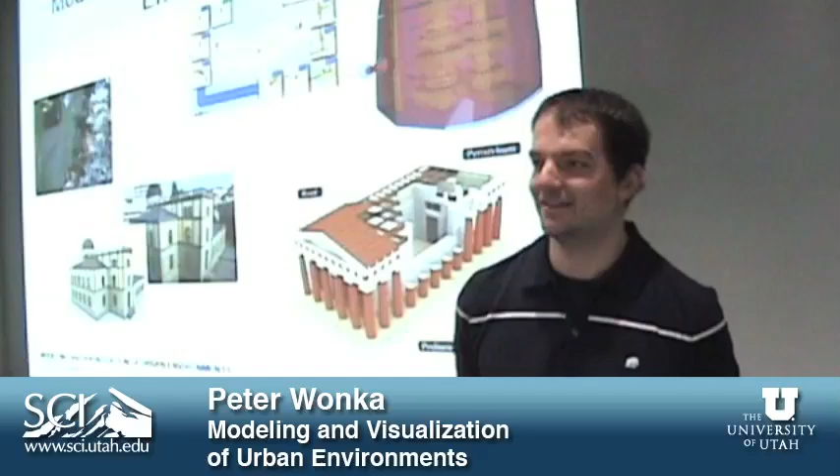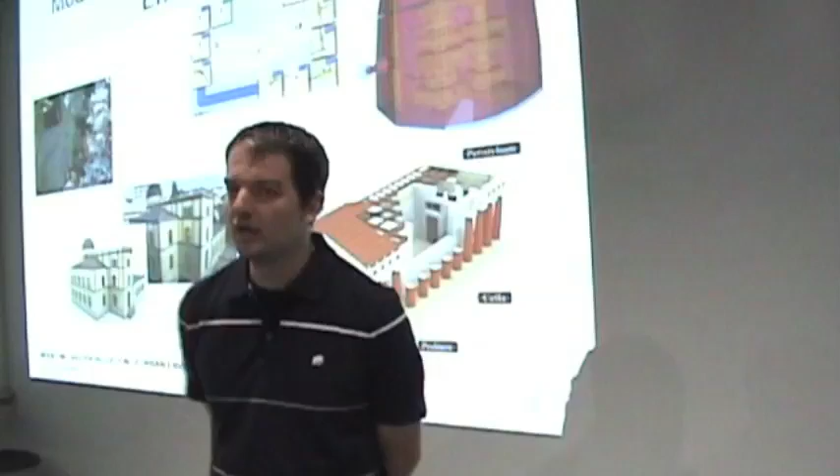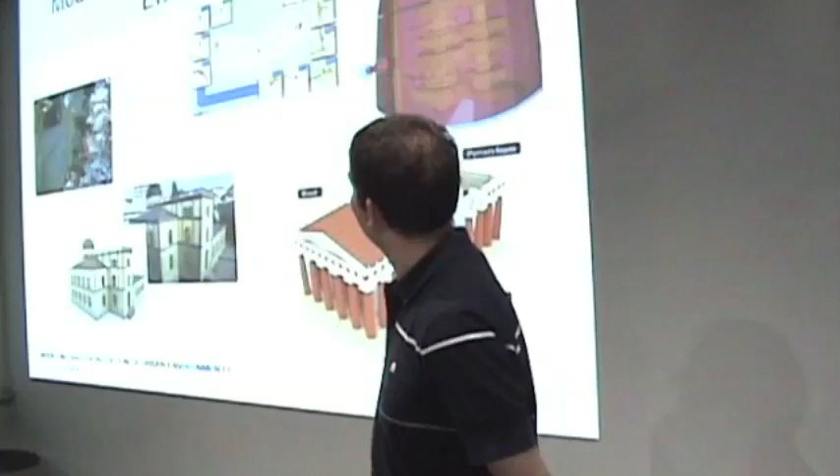So I'm going to talk about modeling and visualization of urban environments. Even though visualization, I named the talk more to honor the strong tradition of Utah. It's maybe not that you will recognize it as scientific visualization in the sense of the VIS community. It's more some visualization of what I think should be visualization, maybe.

So my background, as Chuck said, we had some overlap. I started out in Vienna, at the Vienna University of Technology, and I originally started to study computer science. Back then, after high school, I had a sister in elementary school, and my mother complained that I was working less than her for my studies, so maybe I should do something else. That's when I decided to study urban planning on the side. And as you can also see in my research, I loved cities back then. I still love them now, and I really like to work with urban environments, and this is also where part of my interest is coming from.

As a student, I was also in Grenoble, postdoc at Georgia Tech, and now in Arizona State. What you can observe from my career is a trend of going from the cold to warmer and warmer weather. But I might have overshot a bit at Arizona State, because now it's a bit hot in the summer, so maybe Georgia Tech was the real optimum there.

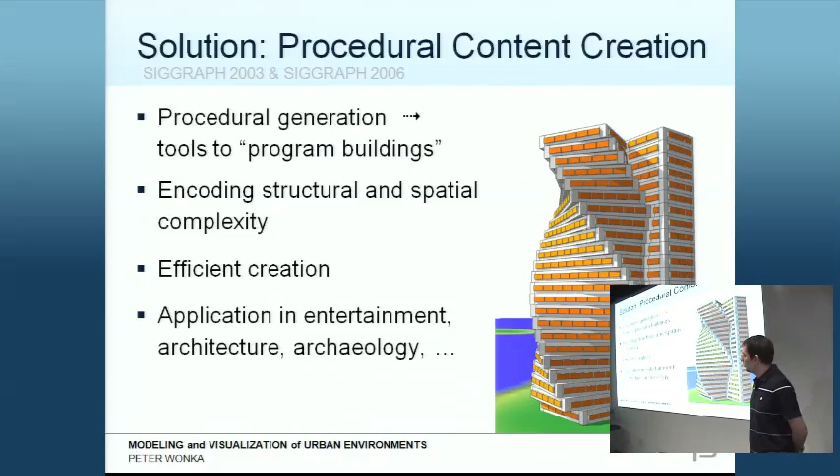And there are a lot of applications for this. Maybe I can briefly illustrate the main aspect of our solution with this video. What you'll see here is just the best video we made, showing a building by a Swiss architect, Semper. This is an observatory.

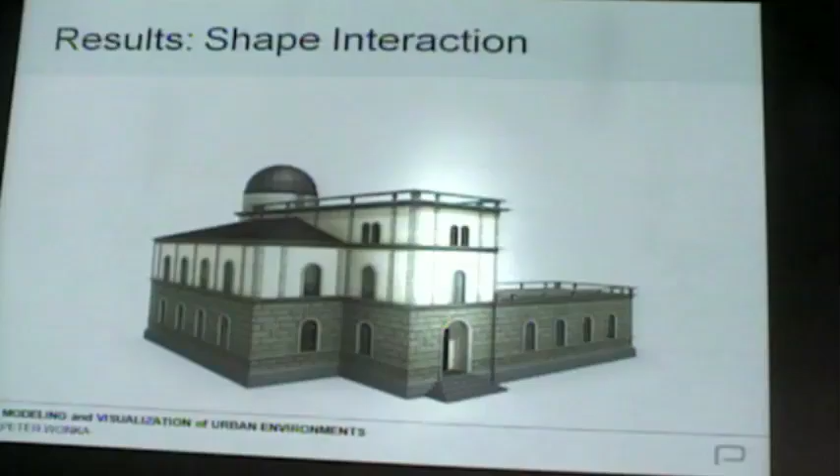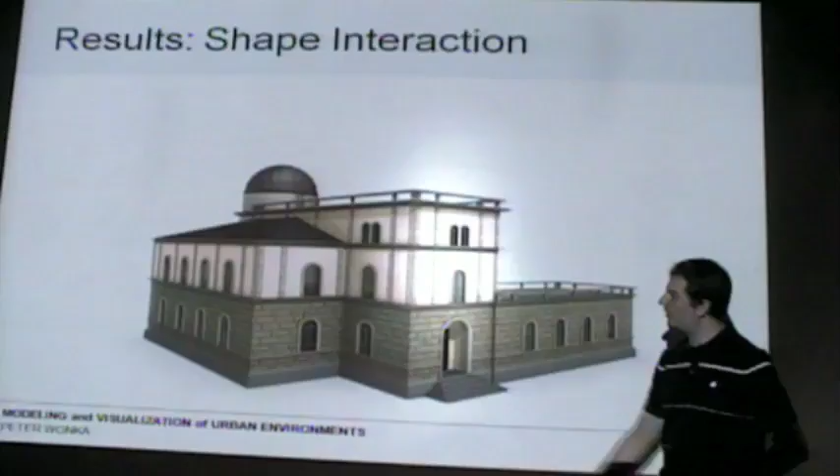In architecture, you want to start with a mass model and then fill in the details. The mass model you see here is one rectangular block for this part, another rectangular block for this whole part, and then there's this rectangular block. There's a roof on it, but in principle it's a rectangle. The fourth mass here is a cylinder.

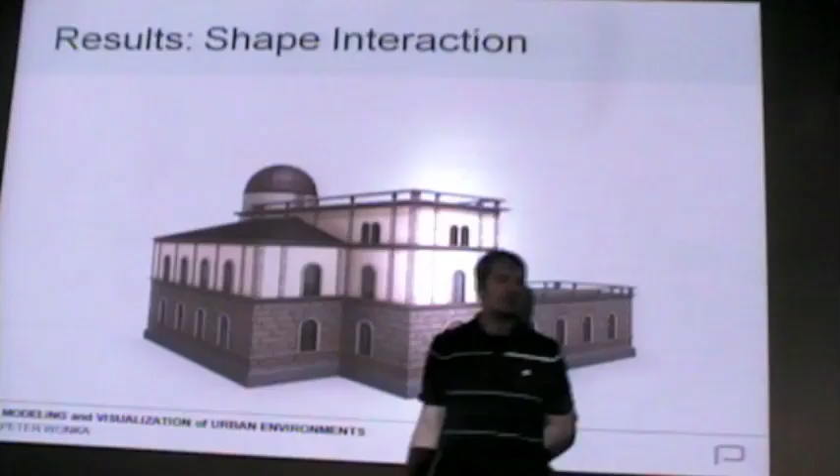If an architect designs a building, let's not talk about free-form architecture but more the traditional architecture for the common person, you'll see a lot of buildings that are basically these masses stuck together. So one part of the solution is to have a way to procedurally describe a variety of masses and combine them. The second part is how can you add facade details, windows and doors, onto these masses.

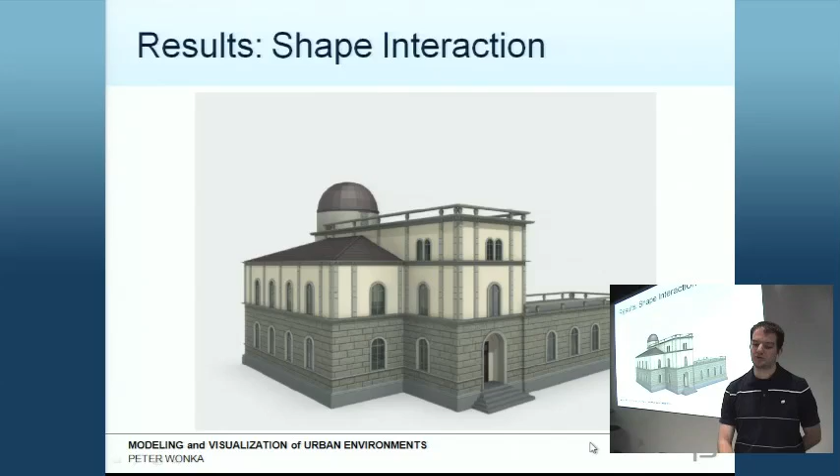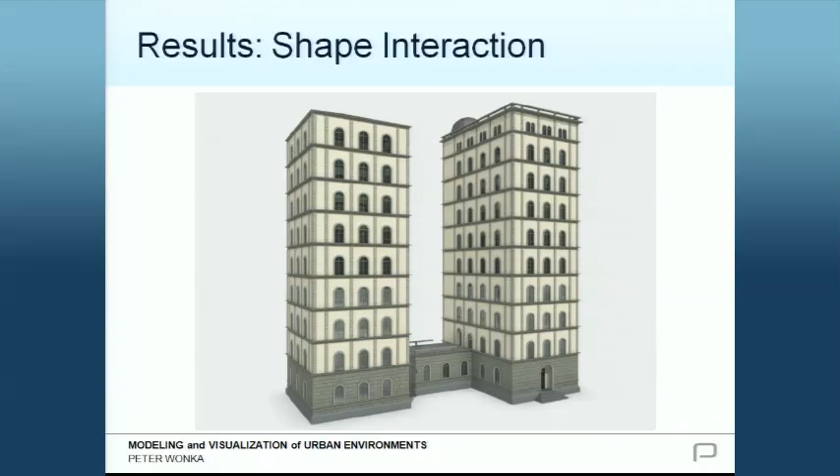The approach we picked was based on this very successful L-system work for tree modeling. We did a fair amount of modifications and changes to be able to model buildings with grammars. In this video, these four basic masses are animated in Maya, but the details get generated in a plausible, somewhat consistent way automatically. The animation of the building doesn't make sense as such, but almost all of these different configurations you see could be used as a building in a city.

So how can you use this type of work besides the straightforward approaches for design in games or movies, where someone says, I have nothing, I want a city, what can you give me in a quick amount of time? One of the major collaborators is archaeology.

If you look at this, this is a virtual reconstruction of the city of Pompeii, which was unfortunately destroyed by a volcano. But archaeologists are interested in maybe how it looked like.

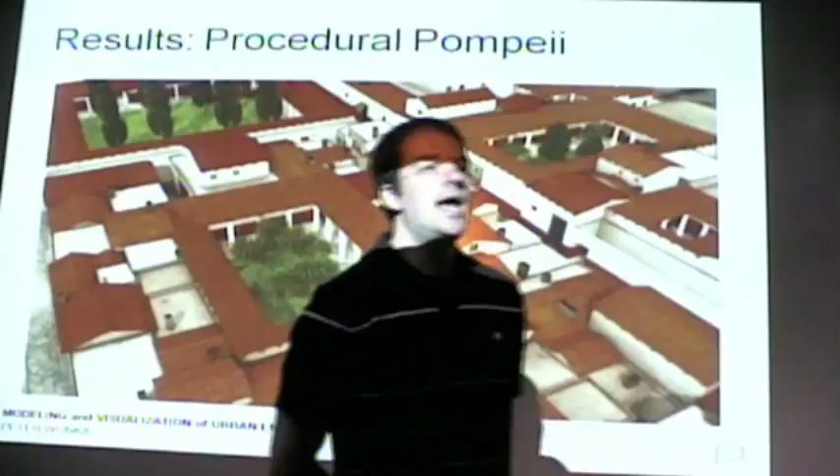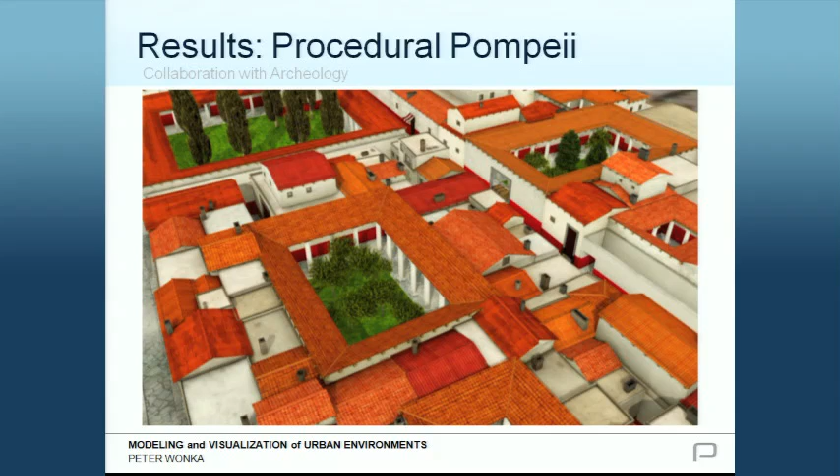They had from excavations maybe some building footprints. So what we did here is we took the building footprints, plausible at least as far as the archaeologists think is how it looked like, and we added based on the drawings they had and different other resources. We tried to encode their knowledge and the variations of how this could have looked like. It's unclear if the archaeologists are totally happy with the results, but this is what we think is the best guess at the end.

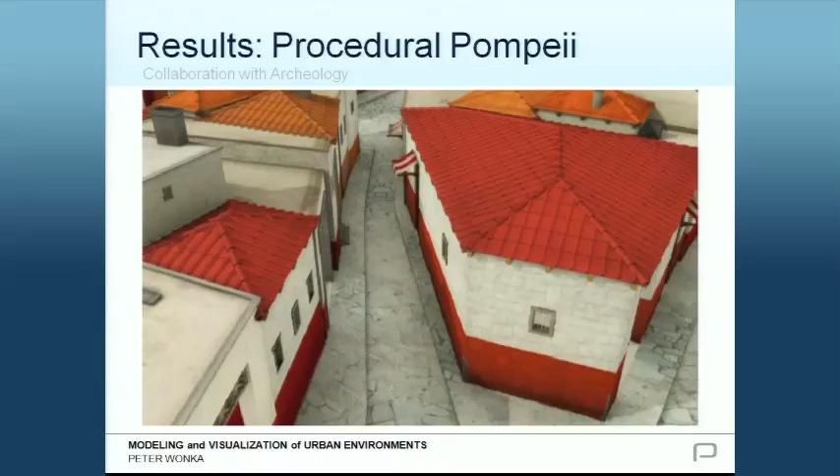So some part is real, the basic footprints and the ideas of how the building looked like, but all the details are basically generated as an estimate. There's no way you could say this door was exactly here before it got destroyed, but you can say maybe this style of door was very common.

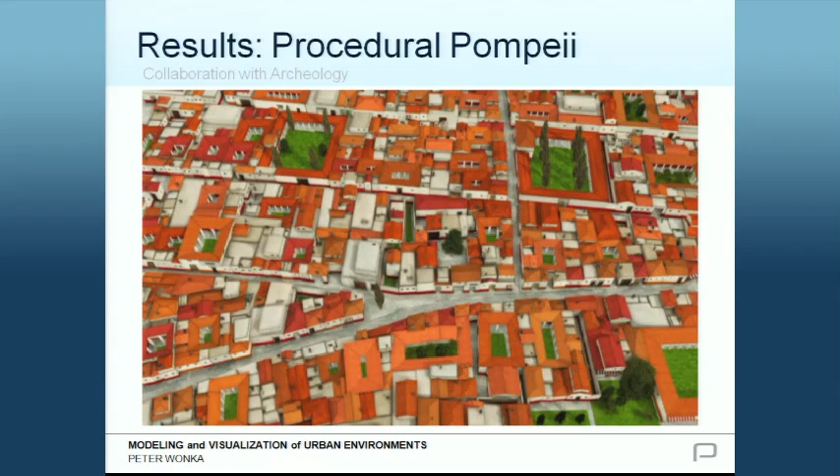So they have maps of the streets. Are the streets laid out according to the map? Basically we start out with GIS data. In modern archaeology, they actually make a photo showing what's reconstructed versus what's real.

Do you have photos or renderings showing what's slightly different in color - what are the things that are really there versus what you built procedurally? Some buildings are still there and some are not, so it's interesting to see the match between those. We basically didn't have the resources at that point in time to make it archaeologically viable. It's more that we show what we can do, so if someone has money, they can invest in us.

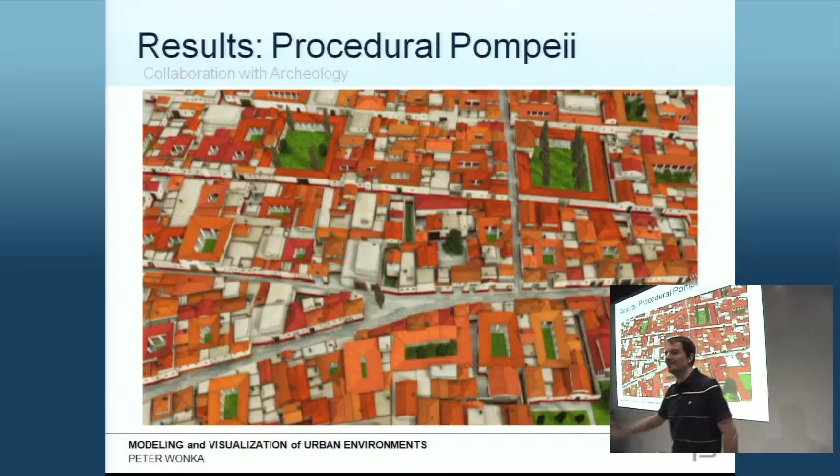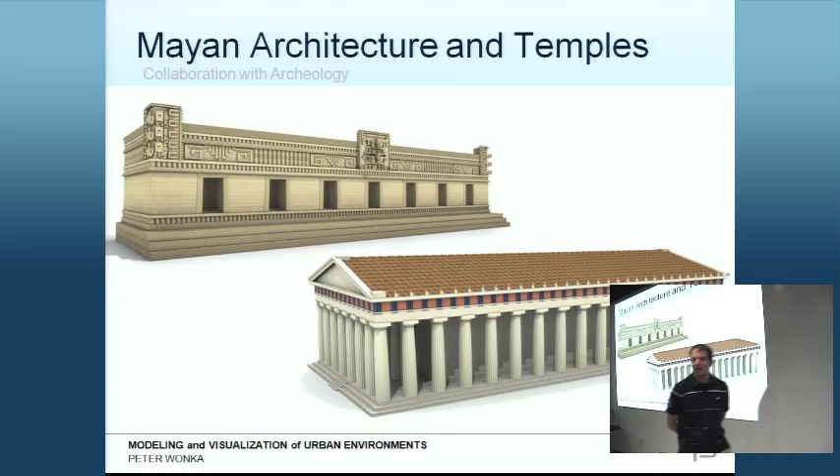This is maybe some work with archeology, mainly to illustrate one point of the application. If you do procedural modeling, you'll get complaints because people say you're creating something that's not real, and we're architects, you're insulting us. But the issue is you still somehow need it - when architects create designs, they come up way late without details, and they need help making their early mass models look good enough to win multi-million dollar competitions in visualization.

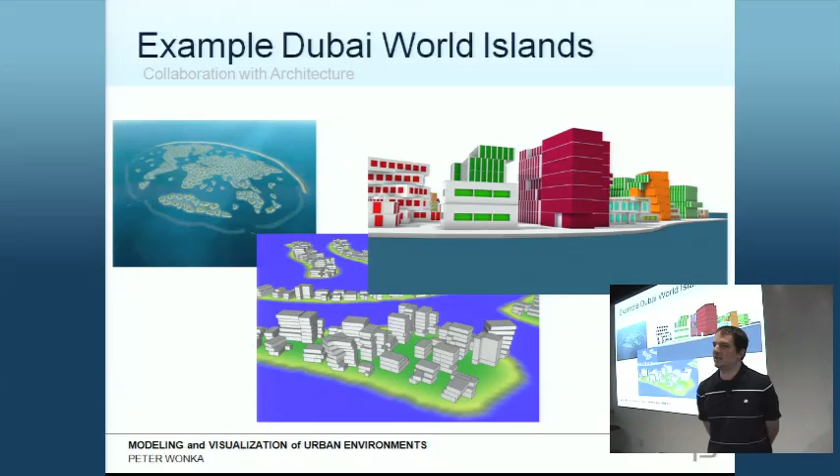They're split. I don't want to say there's a huge line of architects, but a lot of architects are really interested in this - they want to push technology. But probably half of the architects will think we're crazy. I can live with that.

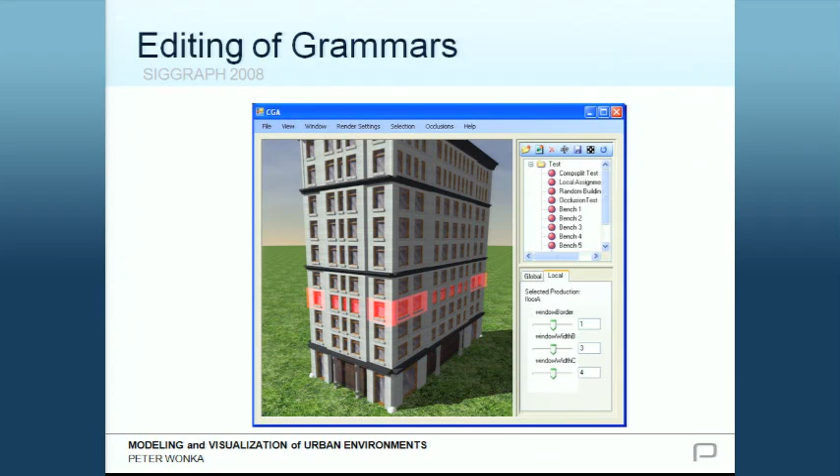So now we have this tool to write these grammars, and if you've worked with grammars or L-systems, it's obvious these are difficult to use. You need to be good at it, and we saw a lot of potential there. One of the first major obstacles was getting away from scripting, because in computer science you feel the simplest scripting should be accessible to everybody, but it turns out that's not entirely true - even 4-line scripts might overwhelm a large part of the population.

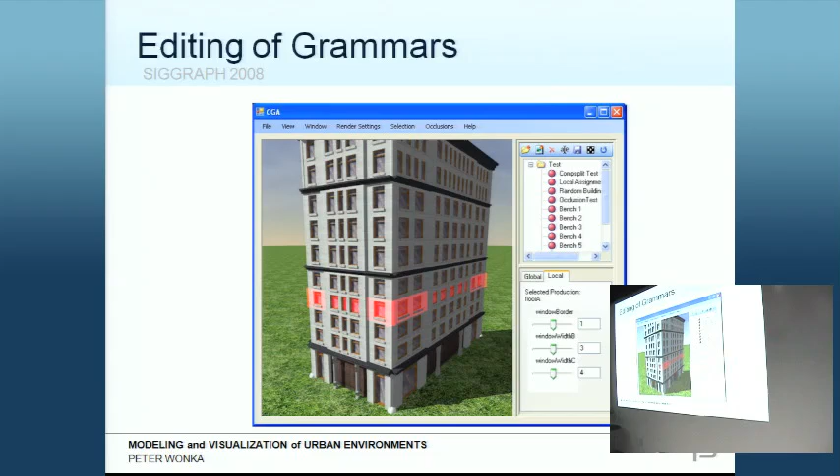So the challenge we looked at in 2008 was: can we, with a purely visual interface, describe these architectural rules? What you see here is a building that is still procedural, so you can take the footprint and change it, change the building height, maybe use some sliders - but all these architectural rules were created with a visual interface.

The second thing we looked at is how to edit a procedural model. Let's say we have this building, and you select this floor shown in red, then want to change the window type manually. So you make an edit - and the fundamental challenge in procedural modeling, which several other people realize too, is if you then make another edit to the building, you don't want to lose the manual edit you did before. Let's say I change the windows, then change the building height - I don't want to lose the window change, though there are several design choices and trade-offs. This is the problem we analyzed in 2007-2008.

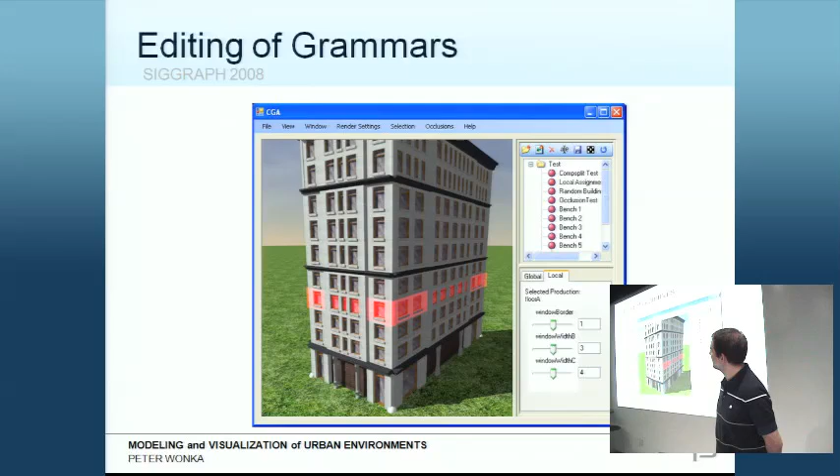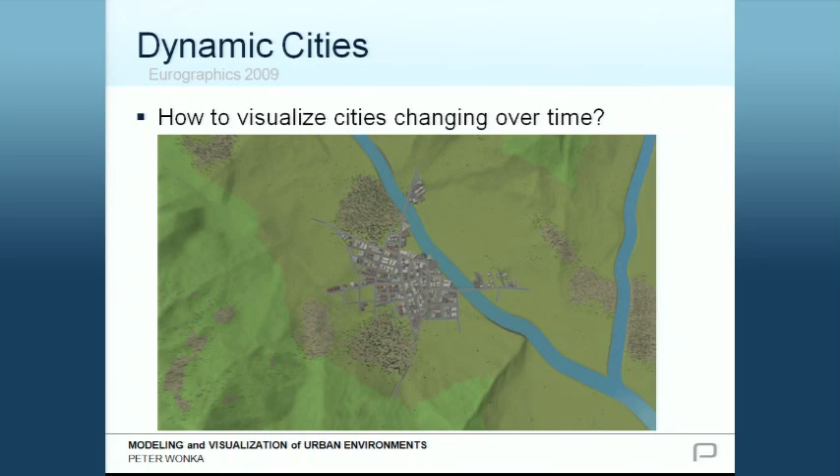This work in 2009 tried to look at the potential to merge our work with urban simulation. So you see maybe a city like this one, and you want to know how it's going to grow and change over time - maybe at one or a few time steps it's bigger, and so on. The work that was there before in urban simulation, very famous, is probably UrbanSim.

I don't know where it started. I think it's UW, and now the guy moved to Berkeley, Paul Waddell. What they do is they simulate urban environments on a grid base with fairly large grid cells, maybe 200 by 200 meters, and they only have aggregated information.

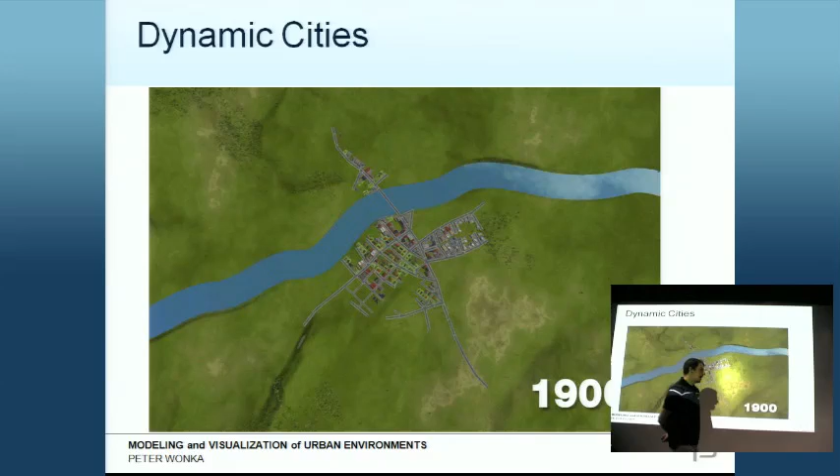So what we were interested in is, can we give a plausible geometric interpretation to urban simulation? This work has a lot of advantages, but it's still not finished. So this is more like a sales pitch from our side about what we think should be done in urban simulation, or what could be the next really interesting step to combine computer graphics and urban simulation.

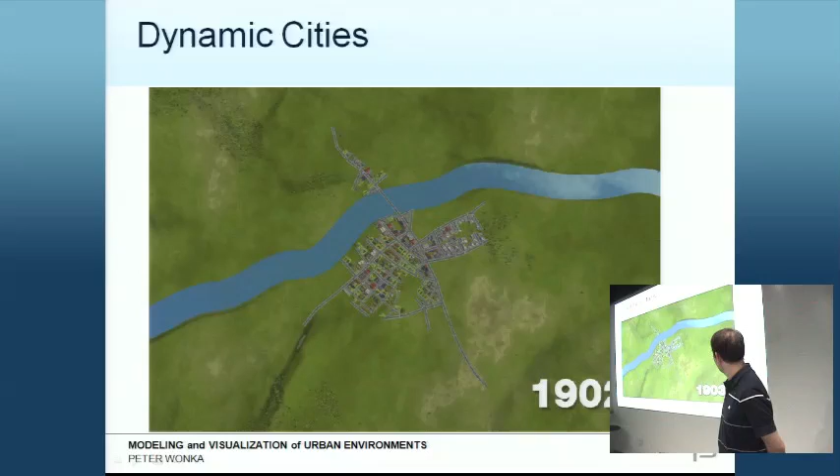So for this, we basically wrote our own urban simulation system. The real achievement from our side is that we wanted to give a plausible geometric interpretation to urban simulation. So we wrote the traffic demand model, the land use model, and all these things. Then, hopefully if the video starts, we basically show the growth of this virtual city.

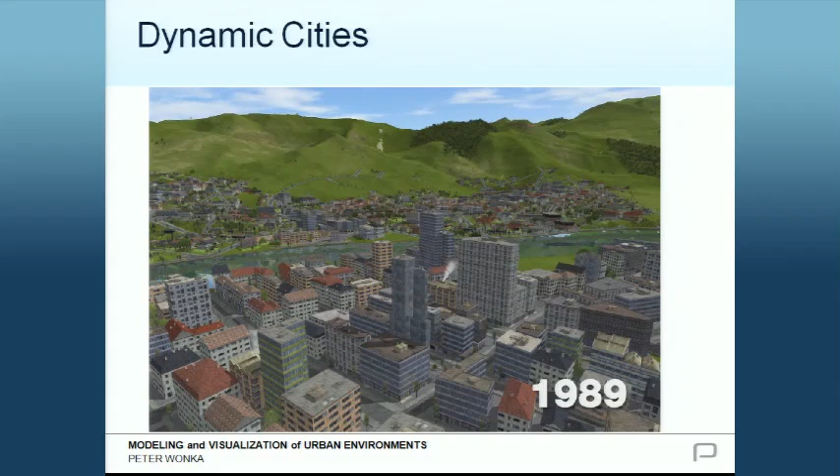What we also did is we basically took Las Vegas as a validation of our approach. We took maps from Las Vegas from the 60s, because it grew so rapidly, and then we grew Las Vegas for several years and compared it, to see how reasonable our approach was. I think we did okay, even though again, this work is

open for discussion. A lot of people in urban planning and urban simulation are very technology averse - they don't like this type of work at all. But several people we met really tried to work very hard on this.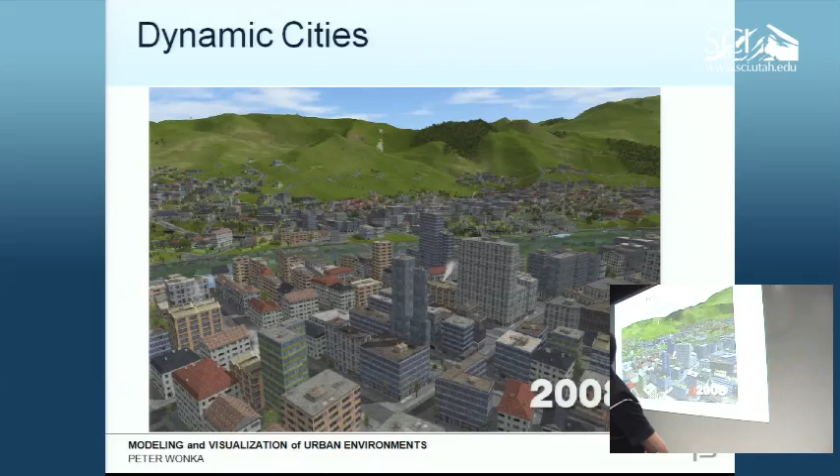Can we give a visual interpretation of how the city is going to evolve? Because in fast-growing cities that I happen to live in, like Phoenix and Atlanta, it's difficult for people to interpret maps that show urban sprawl - they don't get as much out of it as if you showed some visual interpretation of it.

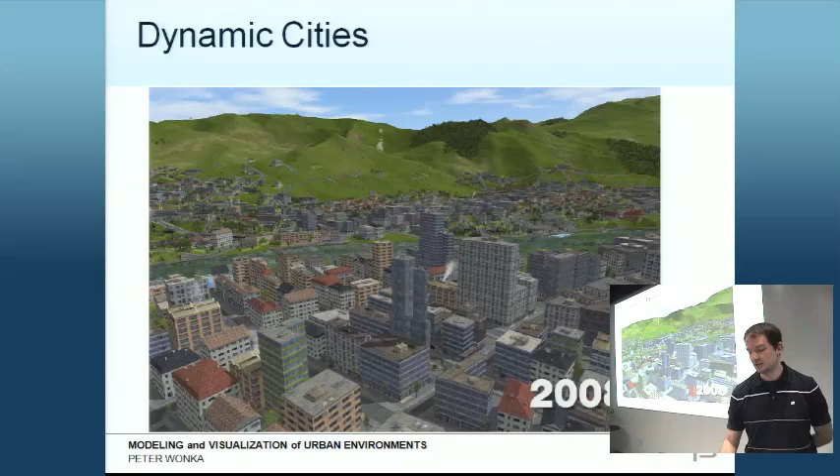And there are urban planners whose goal is basically to do exactly what we did here. Just some example from a real project, a bit simpler geometry, where we used similar technology.

So now this is the time to honor Guoning, who is here. I was fortunate to work with him on this project.

The project somewhat started with me knowing Eugene Zhang from OSU - he was very interested in tensor fields, and I was very interested in urban environments. So the problem that we wanted to study is the relationship between fields and graphs, and I think it's a great problem. There are still several really important questions out there.

But the overall problem is this: you have a field, how can you control the graph? How can you go from a field, like a tensor field, to a graph? And how can you go from a graph back to a field?

Now with this work, we were not fully able to solve this problem. I think we did fairly well on how to go from a field to a graph, but we were less successful in answering the question of how you can go from a graph back to a field.

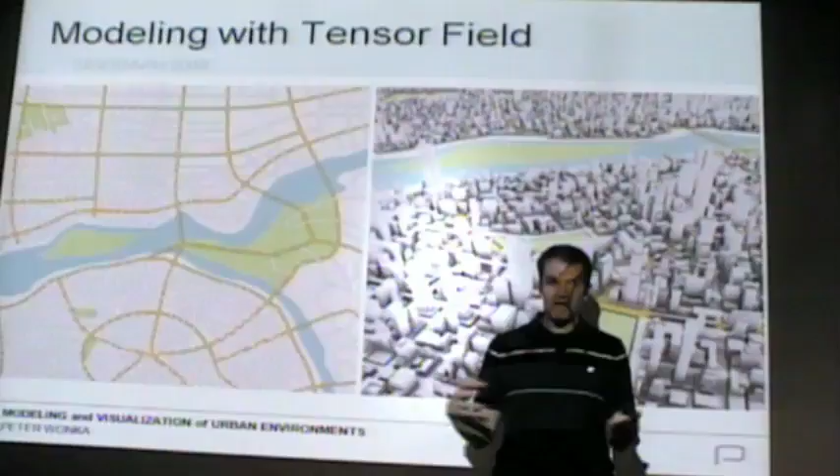And why I really love this work is because somehow I love to study the urban structure of roads, but it was also giving rise to interesting challenges in tensor field design. So we came up with several novel contributions to tensor field design itself, such as some hierarchical design and several things that came from this application in street modeling.

So what you see here is just some output of the street graph itself, and some 3D rendering.

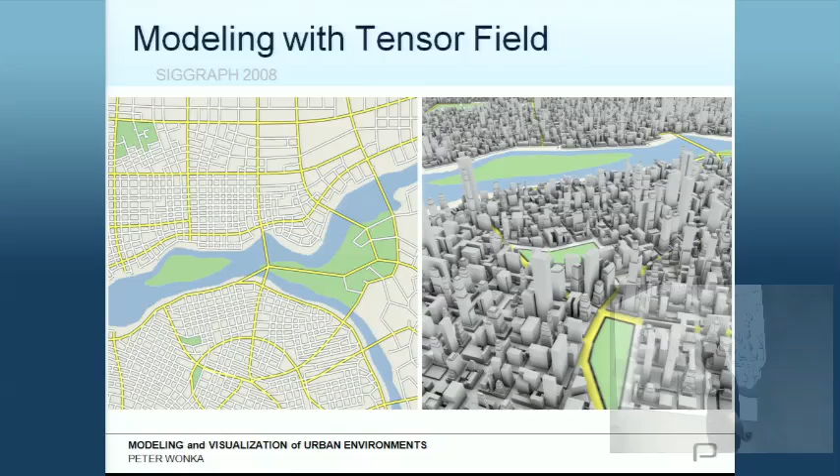And then based on this work, as a next step, we wanted to see how we could basically look at this interplay between pattern design and field design on a surface. So what one of my students, who's graduated now, looked at was: let's say I have a field on a surface - how can we use the field to basically control a pattern on the surface?

And these two renderings should somewhat illustrate the problem. So let's look at, I think it's the Lion or Griffin model, to the left. What you see here is a visualization of a curvature tensor field.

It's done by placing glyphs at various spots on the surface, and based on if this glyph is cut in one or the other direction, curvatures are positive or negative. Based on the elongation of the ellipse, this shows basically how large the one or the other curvature are. And this is somewhat what we would call a local pattern.

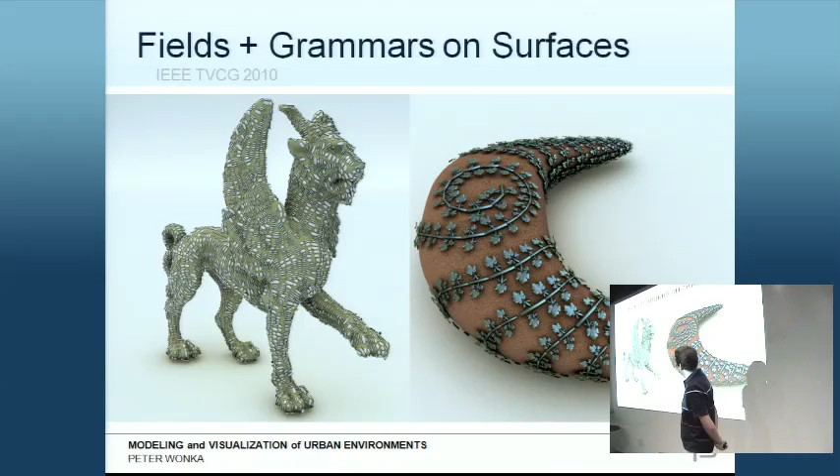Let's say we start with a sphere, and as part of the code that we had is we wanted to re-triangulate the sphere. We want to re-triangulate any model, and then we placed a lot of triangles. We did some greedy growing approach, and then you end up with vertices of different valence.

And then whenever we try to generate some paneling like patterns, these vertices of valence unequal 6 are extremely annoying. They always mess things up. So the problem that we wanted to work on is, can we in a triangular mesh or in a quad mesh now, can we actually control these vertices of different valence?

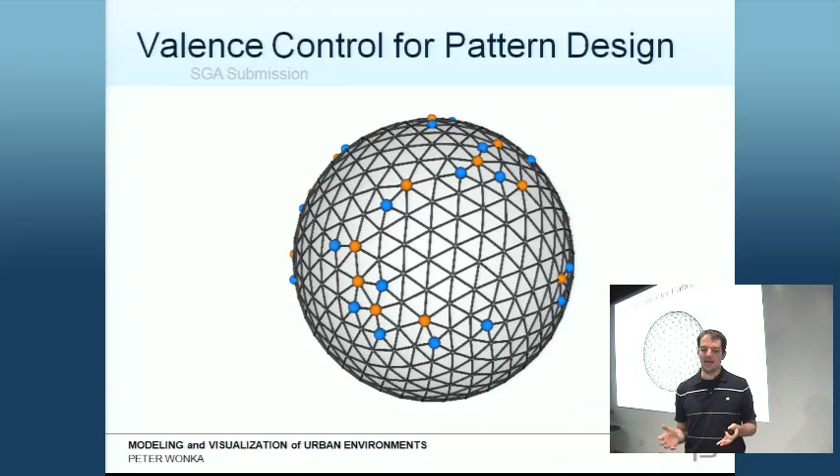And so we came up with a set of editing operations that we actually think is complete. This is everything you can do. We came up with some surprising facts. We had some proofs about how the whole thing worked. And so we had an editing system that basically allows us to have full control over the valence as far as that is possible.

I mean, there are some still annoying restrictions that just cannot be overcome. And these are inherent in the geometry, not in the topology. So even though you basically can give full control over the valence and topology in some sense, there's no guarantee that the geometry itself looks nice.

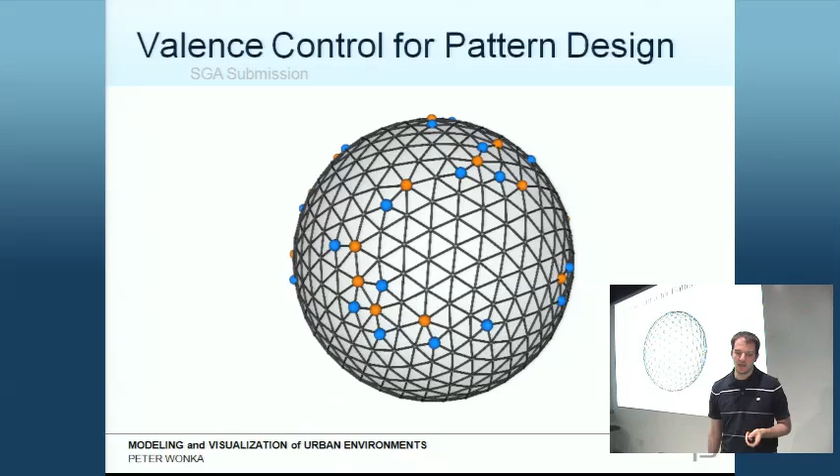So we'll see. We submitted this work. Maybe it got killed, maybe people are happy. So this is just the type of patterns that we're interested in, and we'll show the application of this.

So if you take an architectural model like this one, and we want to have a design on it developed by our architectural collaborators, and you don't control the valence, you get lots of artifacts. So for example, what you see here is that the strips, you cannot make sure they only have width 1. So what you see here is you have to place strips of width 2 — that means 2 triangle strips in parallel — because of the valence.

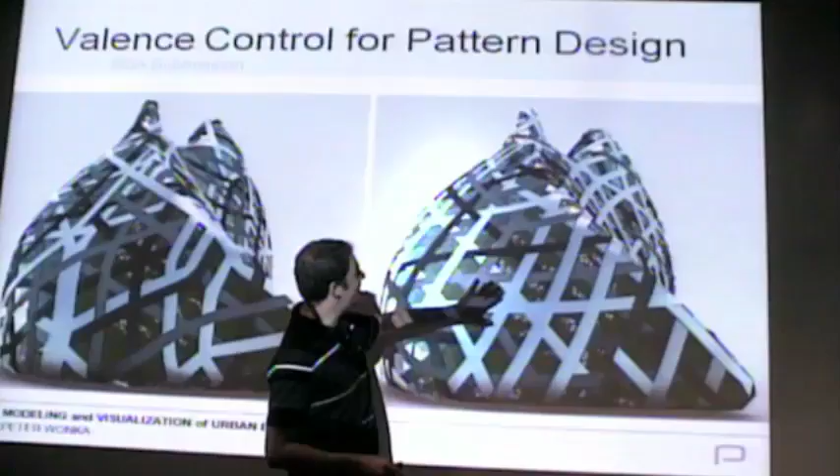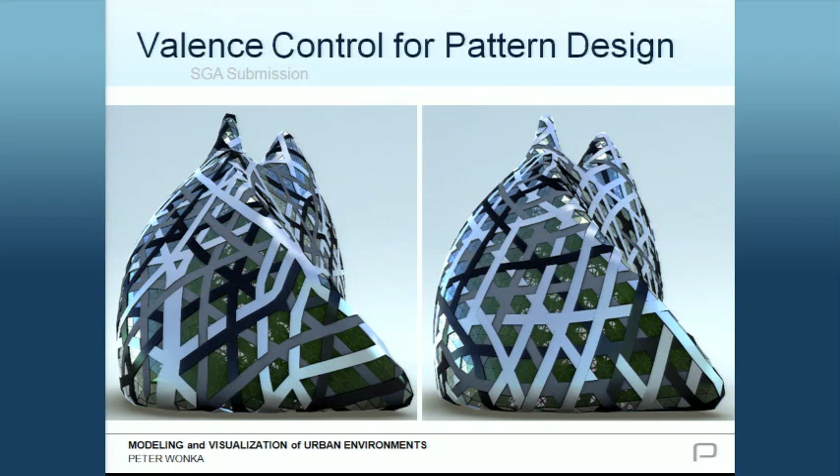You also see that if you look at the shapes cut out between the strips, they're fairly arbitrary and different, like triangles here. Whereas if you control the valence, we pretty much get down to hexagons and pentagons. But there's a limitation: controlling valence doesn't guarantee the geometry itself looks nice. You might have a solution that's just not ultimately what you want from the geometry side. But this wasn't really the problem we wanted to study here.

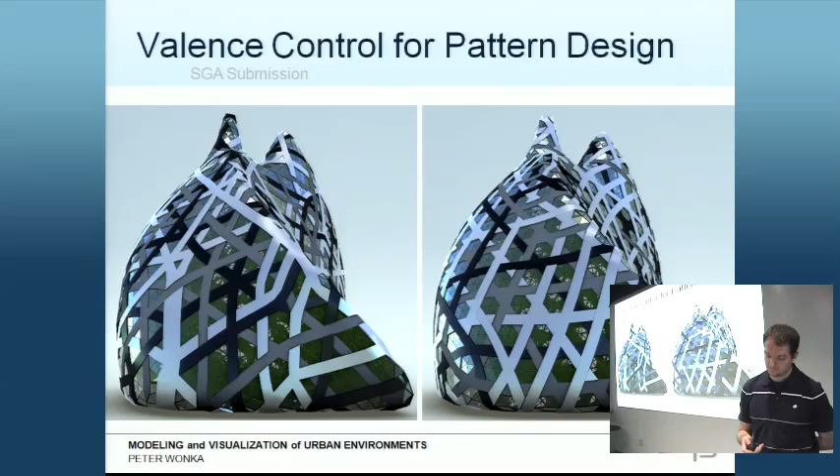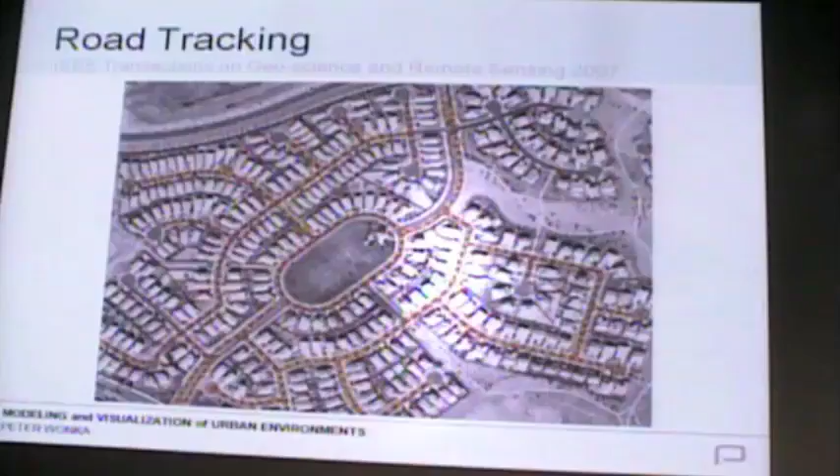Again, it's more like image-based work. Part of what people are interested in is reconstruction from images, so we do some remote sensing type of work. This is a classical problem: given an aerial image, can you find roads, which are linear features in it? You see some results here. We did basically classical remote sensing vision work, using Bayesian statistics, local shape detection, and global analysis of a graph. Fairly classical work, but at the end, in 2007, I think we had the best solution out there for finding roads. Might be superseded by now, but we got pretty good results.

If you go from graphics to image processing, you're always frustrated at how poorly things work. Vision and image processing, to me, is always a cursed topic. You're used to graphics where everything works kind of well, and then if you do image processing you have to lower your expectations quite a lot. Even though the results we consider very, very good, you still see issues, like here there's something missing, or maybe here a complete road is missing.

Question: is this completely automatic from image to graph, or are you still adjusting some of the graphs? No, this is automatic.

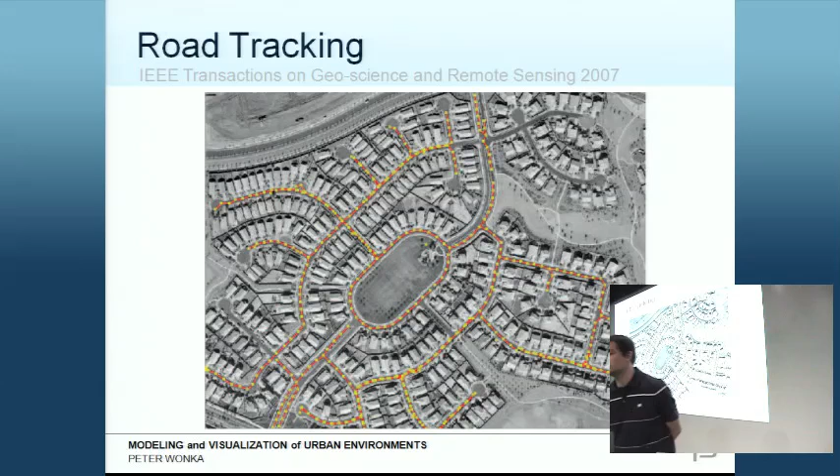This was also some obvious next step. If you have a procedural model—and you know from computer vision that people tried for 30 years reconstructing facades, and they can't do it pretty much at all—so it's like now it's someone else's turn to try. And still, man, this is a hard problem.

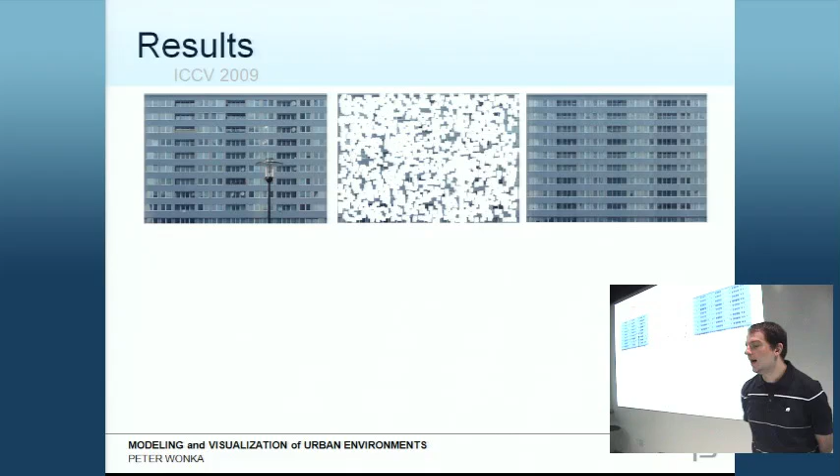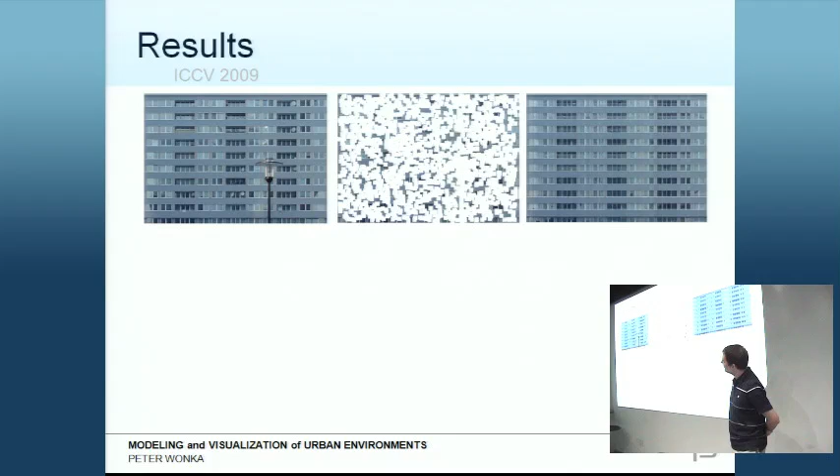And so we hope to get some NSF money for this maybe in the future. But somehow I kind of really like this idea.

How you're going to solve it is you basically take the rank, and then you reformulate, and then what it leads to is that rank is non-convex, so people look at the trace norm as probably the tightest convex envelope, and then do some trace norm optimization.

So kind of our part here is we'll try to find any interesting match between an application and the methodology, and then go back to the methodology and come up with a non-trivial modification of the problem statement.

So is it right to think of this as really a constrained optimization problem, if you want to formulate it that way, where you have to choose constraints based on the data of both your input and output, and what you want and what you have?

Yes and no. It's kind of tricky to say. This is a very focused area—typically this is convex optimization. There are always some form of constraints, but this type of work is convex trace norm optimization. I don't know if constraint would be the distinguishing feature.

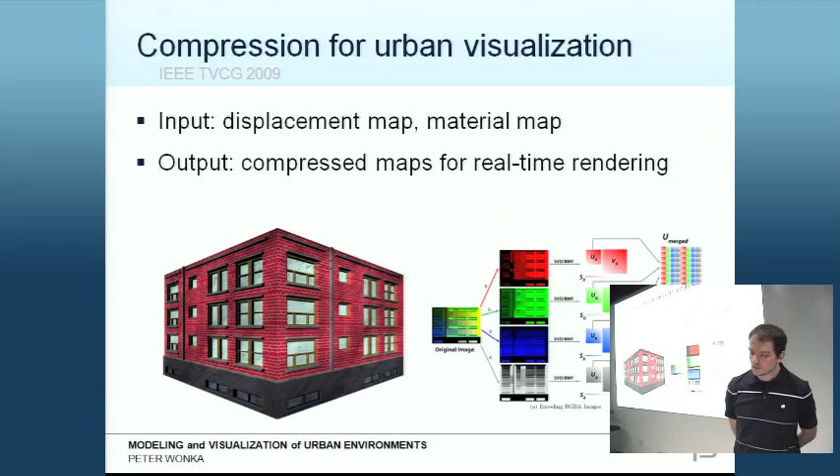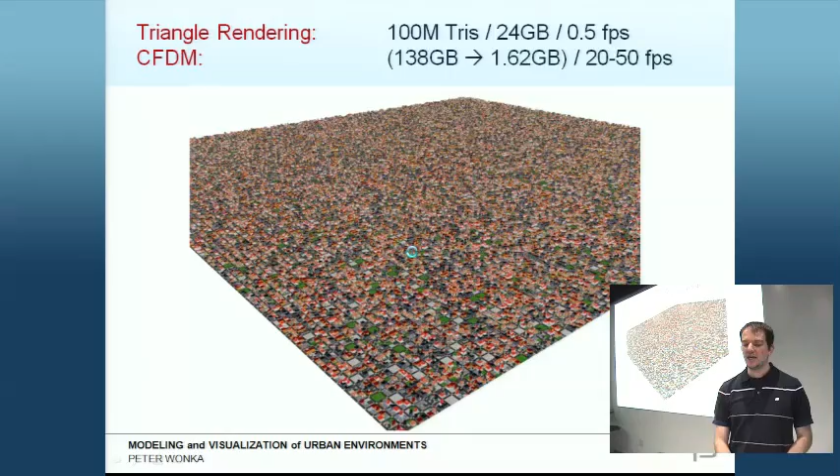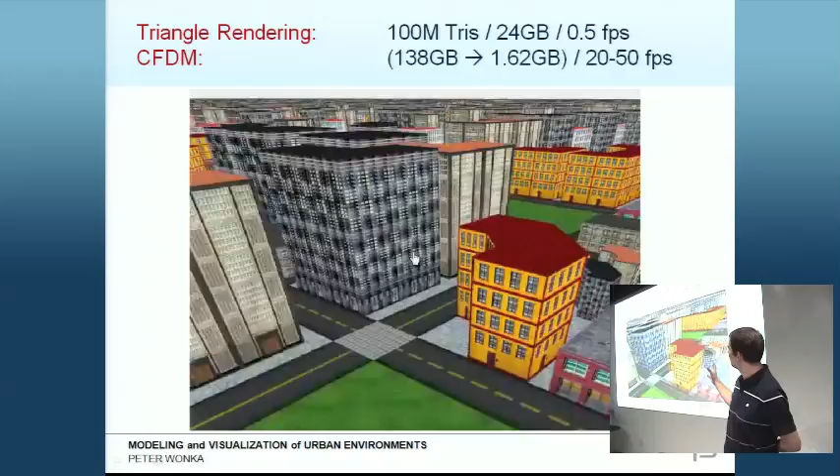So this is what we did, and I think we came up with reasonable results. Then there are all these system issues, how you code the textures and all that. But at the end of the day, we were able to render something that in theory would take 100 million triangles and compactly encode it. We stopped the work before going into rendering details, because there's aliasing and other things that could be done, but we didn't go too much into that.

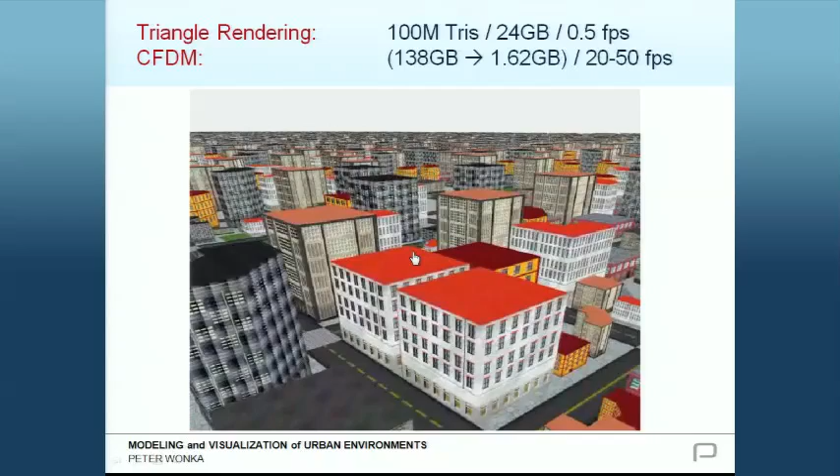Now the question—this is somewhat open, we still work on it—can we find other interesting problem statements that we can use in an application?

This is almost classical now—we studied it earlier—but you want to do non-negative factorization and sparse factorization. Sparsity usually goes into this one-norm, sparse learning type of thing. So here you also need to do some more.

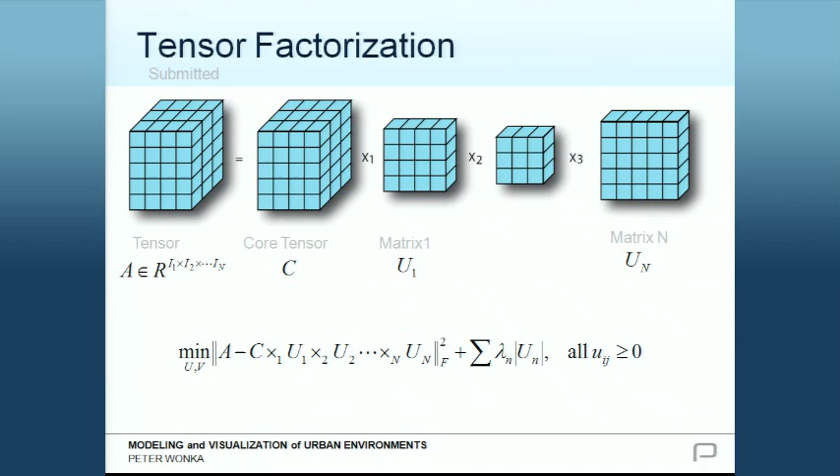You also want to go from matrices to tensors, because everybody is working on tensors now—you can go to an NSF panel. I'll go over the solution here.

I really wanted to do this also for computer graphics applications, and we looked at several things. There's a fairly natural extension to volume rendering, which we haven't implemented yet, but also to some form of material editing type of work. This is ongoing work, so I'm not entirely sure what the best way to go is yet, but I'm very hopeful, and I think it's a really interesting problem.

Before you do that, have you seen Tammy Kolda's work on tensor factorization? She's at the Sandia National Lab, where she does constrained nonlinear optimizations for tensor factorization to try and find missing data or multilinear structures and things like that.

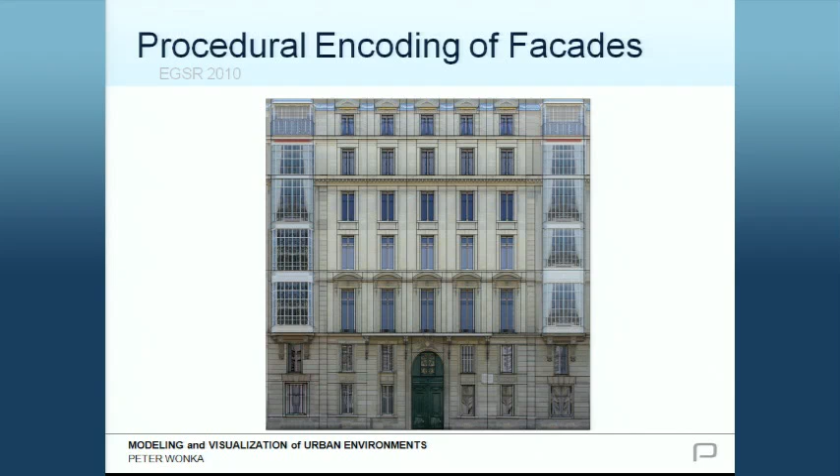Okay, this work is going to be skipped. This is some rendering and coding work we also did recently.

I just want to show this one more problem - I like that a lot. Now the problem is you have remote sensing data, and then you have basically an image. That's one way to look at it.

So this is an image, but instead of having a red, green, and blue value, you basically have 180 different spectral samples. A lot of these samples are not in the visible range, so the human eye can't see the spectral response. This is really not a visual type of entity - it's something you need to visualize to show the information.

So the question is, how can we come up with - you can also look at it as a tensor with 180 spectral samples - how can we take this tensor and transform it into a visible image? And here again, what we try to do is come up with an interesting formulation for an optimization problem where we say, well, we want to maybe preserve features or distances in this high-dimensional color space, and we want to keep them in the low-dimensional color space. This is one thing. Other things might be, it should be fast enough, so it kind of makes sense.

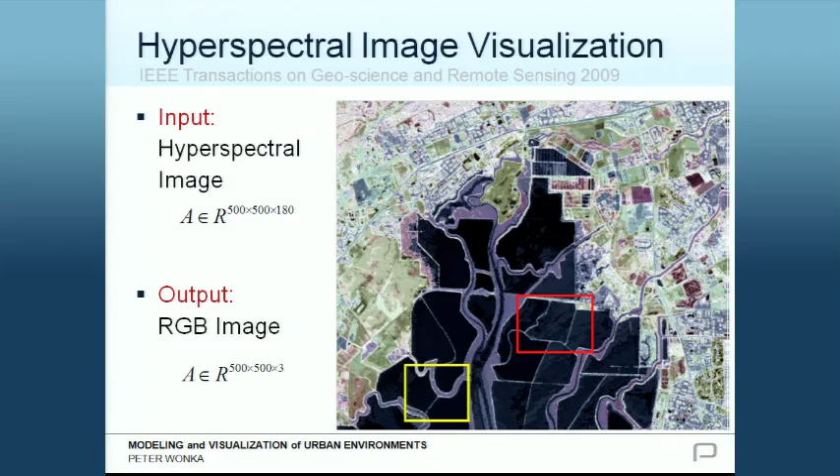So the idea is, even though you can do something that is feature preserving, you need to still use the visible range of brightness well enough so you can actually see something. The existing solutions are pretty bad hacks, and I don't know why no one complained about it. Because what people do is they first preserve the features, and then they scale up to the visible range, basically ruining everything they did in the first step, giving you more or less random colors. So what we try to do is bring some more order to this.

What you see here is the correct PCA version, which would be very dark. Now you can make it bright and colorful, but then you ruin all the feature distances. This is something we can fix, and this part we published.

There's an extension we tried to do where we wanted to build a much larger system and also incorporate additional terms in the optimization. For example, this is the one problem: if you do this mapping, you have absolutely no control over the colors. So the idea is if you get this, you don't really know if this is a lake, a mountain range, or a field. The additional constraints of mapping it to more natural colors should help in this interpretation.

Now, we submitted that. I think the future of this work will be to go more into interactive tools. But unfortunately, the student left now, so I'm not sure how and if that's going to happen. My point of view also is that this is a problem that's underrepresented at Viz, but we'll see if I can effectively change that and make it more prominent.

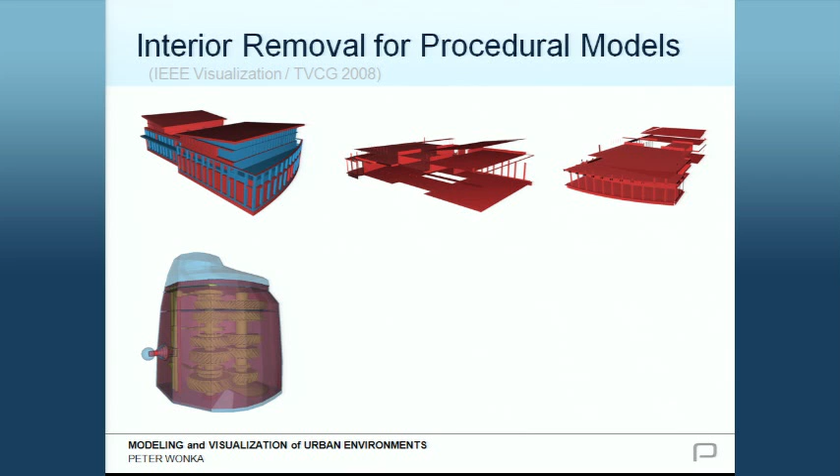So the rest of the work will all be skipped because of time reasons, and we go to the last slide.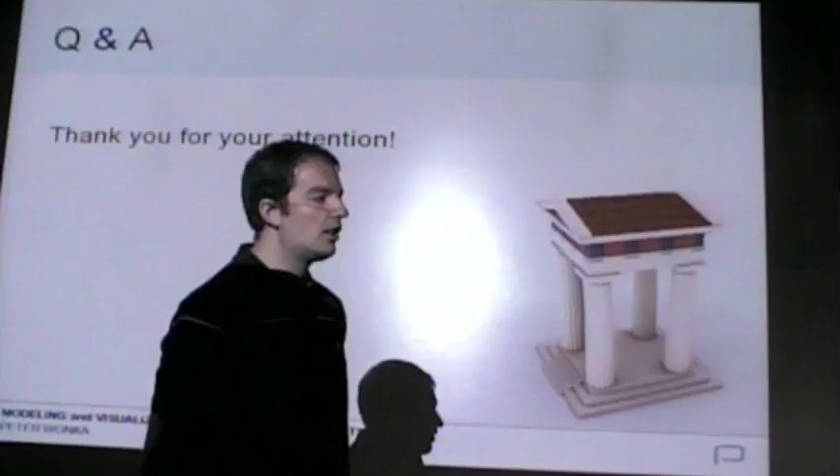Well, at this point in time, we're more concerned about just making it more interactive for them. We are not totally at the point where we have robust enough tools to do more like wacky studio architecture, where architects go out and try things. One of the results I show for the valence editing is you can go a lot more crazy than that. We have some plans to try to go there, but we feel we're somewhat held back by the large system approach. It's difficult to get the system robust enough and get enough tools really implemented. So we studied a lot of the architecture, also the modern freeform architecture, and we concluded that a lot of the designs are an accumulation of many different simple tools. The issue is one guy uses tapering, twist, and bend, another uses NURBS, another uses texture parameterization. So it ends up that we would have to implement 10 to 15 complex algorithms and the user interface for them. This is holding us back a bit. We'll see how successful we can be.

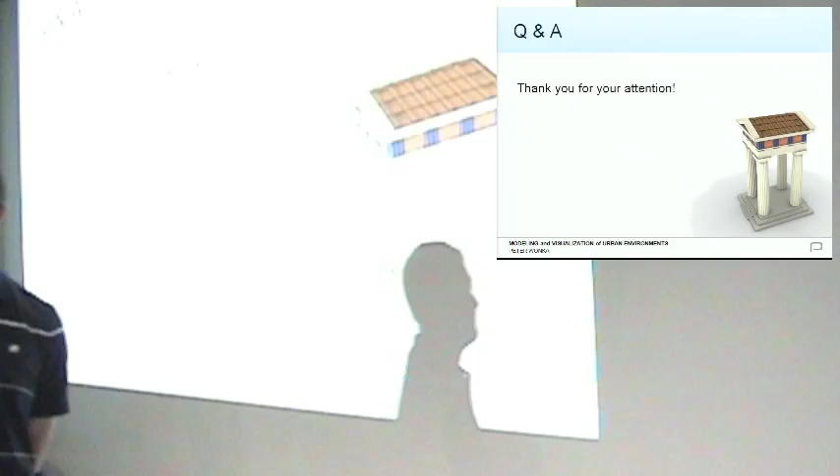So everybody that visits Arizona State University gets a tour of the decision theater. And I noticed you didn't show anything on that.

You want me to say on record, or are you kidding? You can hook the polygraph up.

We had some work that was shown in the decision theater, but I myself am not a VR type of person, and we look at it mainly as an outreach type of facility. They've now gone into some different directions, so we'll see if our paths meet again in the future. Right now, probably not so much.